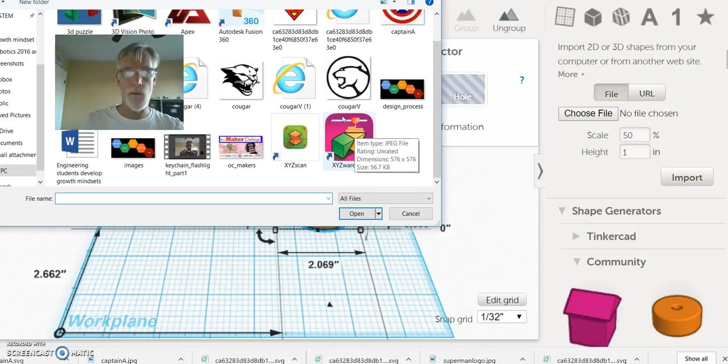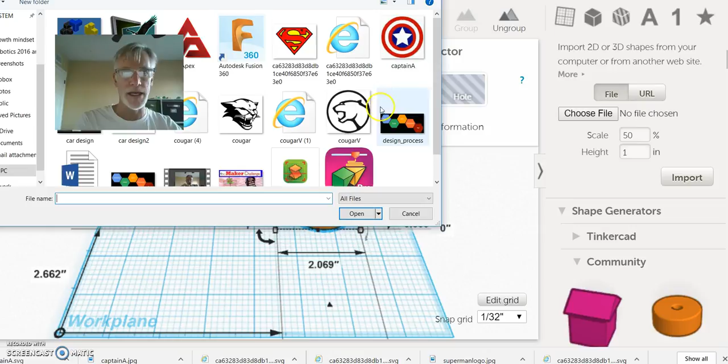And I'm going to click on over here, Choose File. And now, I wonder if it's in my downloads—I didn't look to see where I was putting it. It's always a good idea to look and see where your file's going. I think, yeah, this is my JPEG, I don't want that. So I'm going to go back to this PC and look in downloads. I'm going to double click that.

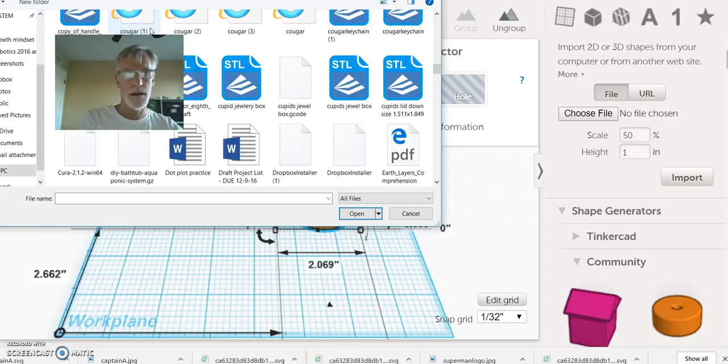Okay, let me search the name. There it is, right there. Okay, so this is it, SVG document—that's the one I want. I'm going to open that.

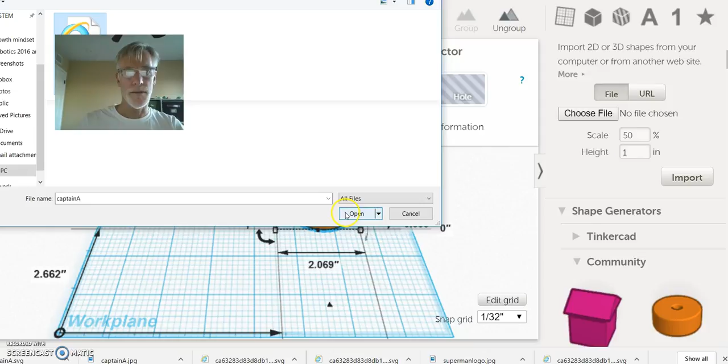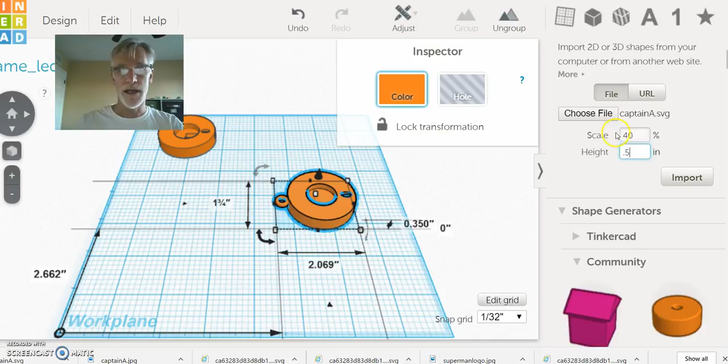And now yours might say scale 100%. I have already changed it to 50%, and that's still probably going to make it huge. So I'm actually going to go 40, and we'll probably still have to shrink it down. And where it says height an inch, I'm just going to make it 0.5 inches right now. That's still going to have to be smaller, but for right now, that's what we'll do.

Okay, so there it is. And the nice thing about this is it's a circle, and I know my dimensions are 1.75 by 1.75 for x and y. But just to show you another method in case you have a different type, I believe you do Shift and the corner, and it will change your X and Y dimensions proportionally, so you won't get a long skinny one or a short fat one. It keeps the proportions correct.

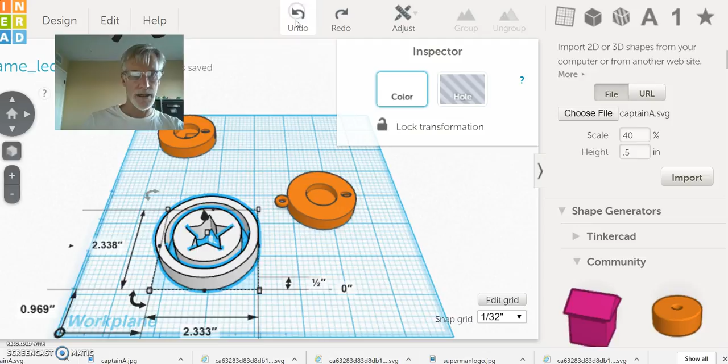So I'm going to use that method to change the size. I'll click on there, and I'm clicking on there, and using my mouse to... oops, wait a minute. Let me undo that. Shift and that corner button, and now see it changes proportionally. So let me see if I can get to 1.75.

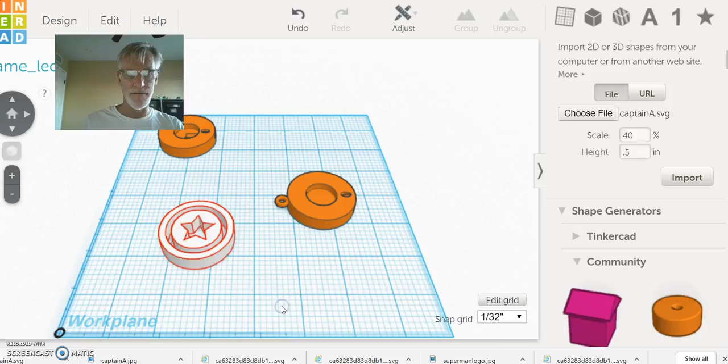I'm getting close, but I'm set to snap at 1/32nd, so what I am going to do is just change these with the ruler. I'm going to do 1.75 by 1.75, and that should give me perfect dimensions.

Now, 0.386, that's way too big, that's way too tall. I want just a skinny emblem to make my device not too much bigger. So I'm going to do 0.1, 1/10 of an inch.

Okay, now I'm on the wrong plane. So what I could do is sink this down to negative 0.1, and that should drop me just down below the surface.

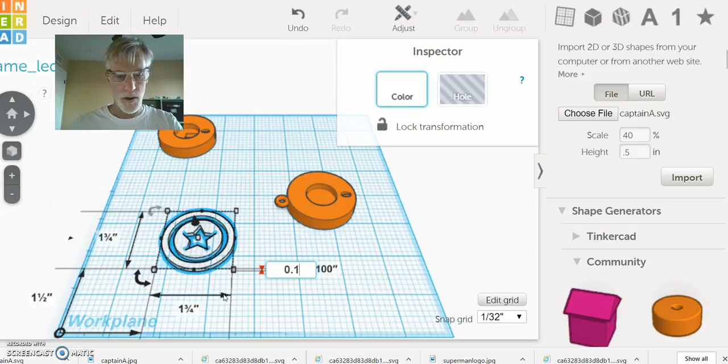So now I'm on the other side of this plane. And you know what I'm going to do? Just to make sure they bond together well, I'm going to make the depth 0.1, so now it should be sticking up through the plane just a smidgen.

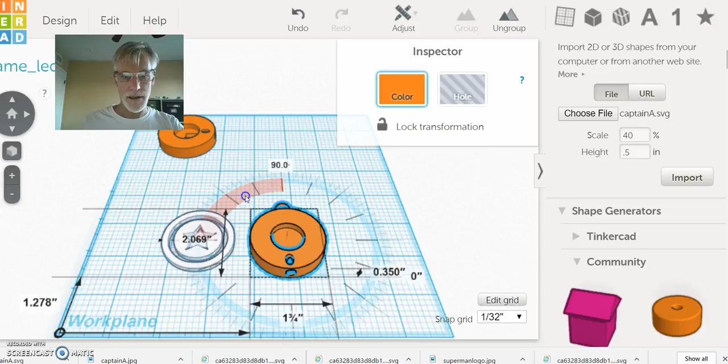Okay, and now I'm going to drag this over. Oh, you know what, I'm going to turn this... no, that's the wrong one... 90 degrees, so that the star is facing up.

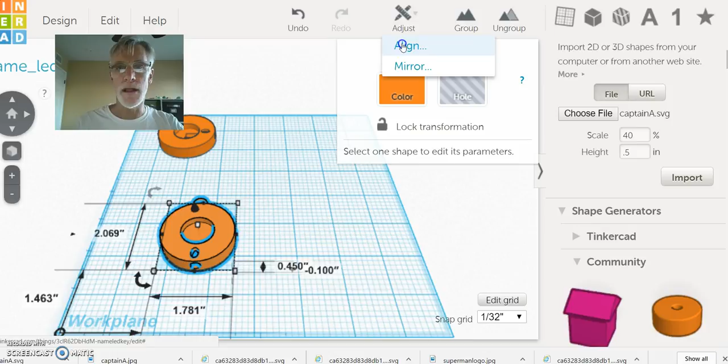Now I'm going to drag this over on top of it, and I will just make sure that everything is centered. Let's do align, center, center. Now I'm going to group them.

And now what I want to do, it's sticking down through the work plane. I can't have that when I go to print because it will want to print below the surface of the printer. So I need to lift it up onto that surface now. Now that it's grouped, I'm just going to change this to 0 and pop it up to the surface.

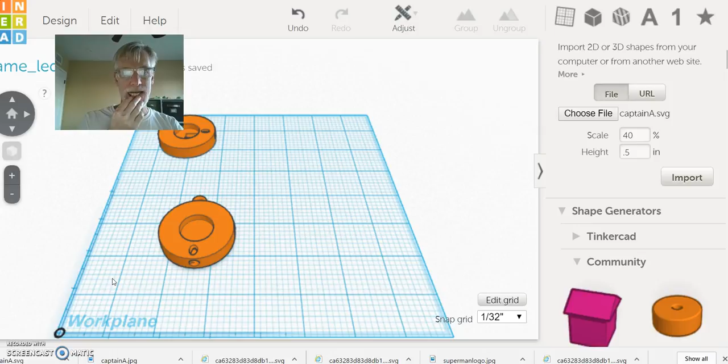And I could print it on that side, or I can flip it over. I think what I'll do is flip it over 180 degrees, and make sure you do it exactly. I've had some problems being off by a degree, and it doesn't print well.

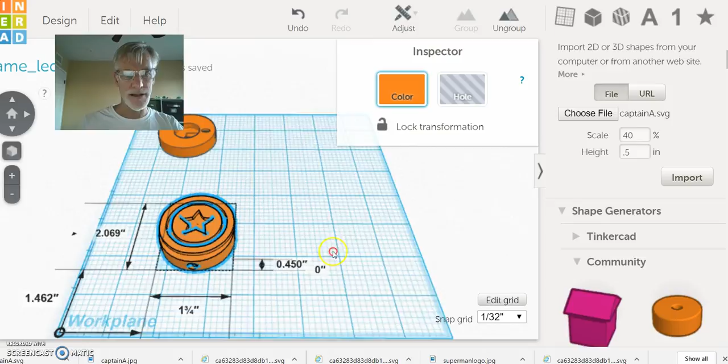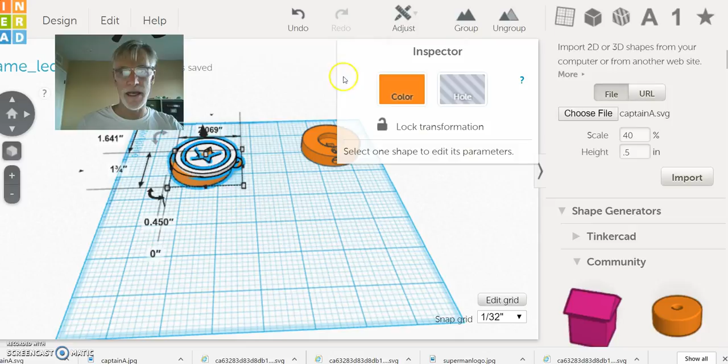And now that doesn't look right to me. Oh, that little loop on the top made the center not perfectly centered. So these kind of problems happen sometimes. Let's do this: let's go over it all, do ungroup, and do ungroup a second time because we're trying to ungroup this little ring here.

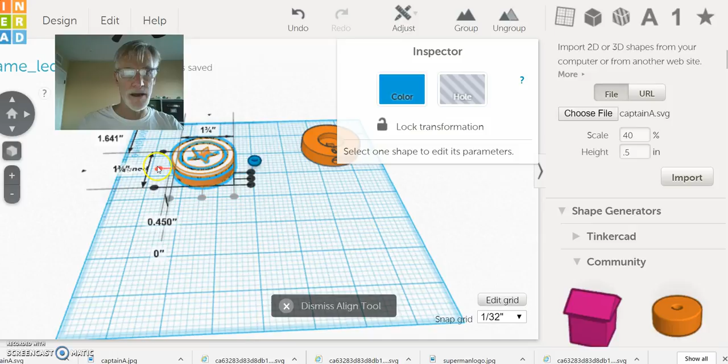Okay, now I'm going to align these two. So align, adjust, align, now center, and that way already is centered. Okay, so now what will be good about this is let me group these two. Group them. Okay, now it's all one piece.

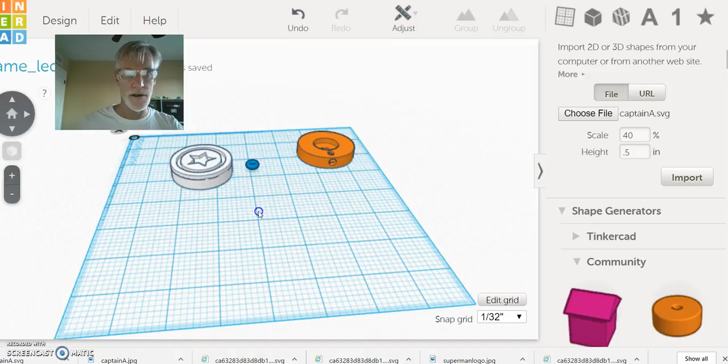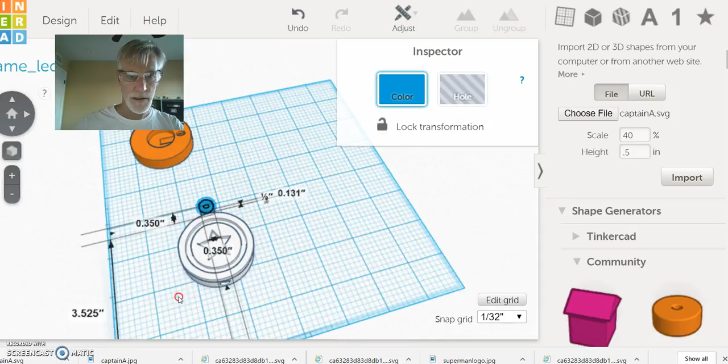Now I want to get this... oops, that was hard to get. Okay, what the? Okay, I'm going to inch it down, come around here... so... oops. Want to penetrate that just a little bit.

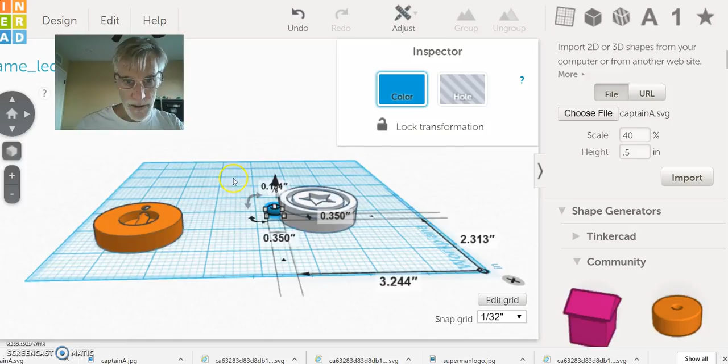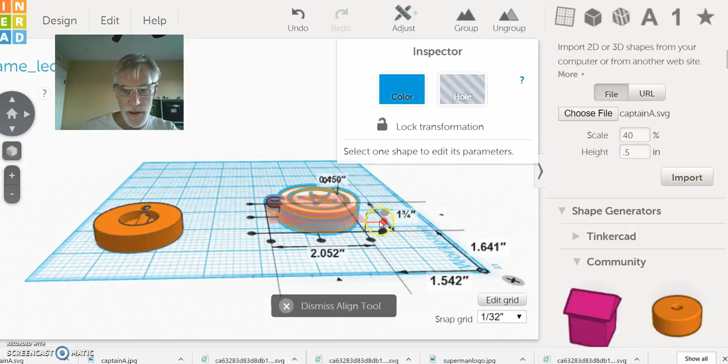Okay, and now I'm not quite centered up and down, and I would like to be. So I'm going to drag over those, do adjust, align, and now see these three up and down dots? I'm going to center everything... oops, how did that happen? Oh, I did the top one. Okay, let's center it. Now that's centered just the way I want it.

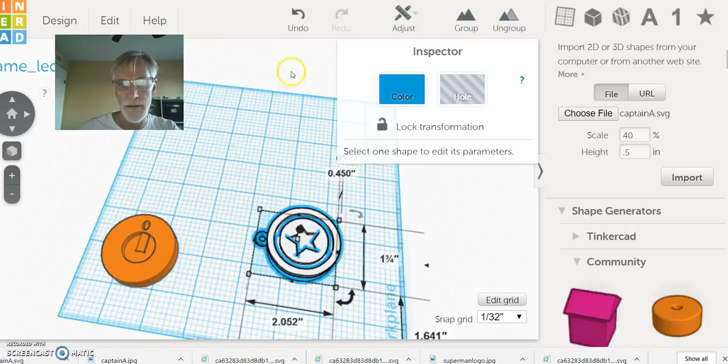So I've got a nice little Captain America symbol here. And I'm going to group that now. Okay, and I think I'm ready to print this. So there you go, that's the next step.